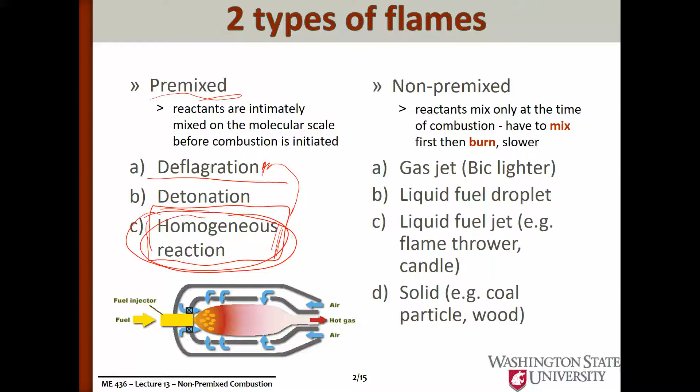Some examples of non-premix flames: these are the Hollywood special effects flames. A candle - the fuel is in the wick, the air is surrounding it, and you get some natural convection that replenishes the air while the fuel stays centered. It's only at the point where fuel and air meet where there's this cone flame.

Other examples would be our diesel engines, a flamethrower, a campfire, burning coal. All of these are non-premix flames because the fuel and the air are not perfectly mixed prior to ignition.

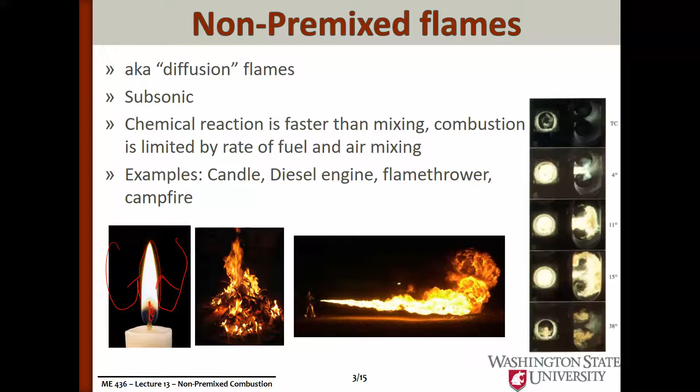In the last lecture we had this reaction zone that moved forward or backwards in one direction, in the direction of a mixture of fuel and air, and behind the reaction was products. In this case, you can imagine we have this surface perimeter where air is on the outside and fuel is on the inside, and right where they meet is where the reaction occurs. If this is a jet of fuel coming from the left hand side of this image, the center of that jet won't burn until it's been able to mix out to the edge where air is.

If you were to plot the fuel concentration, on one side there's some high concentration of fuel, and as you get close to where the reaction is occurring, the reaction is consuming that fuel, so there's going to be virtually no fuel in the area of the reaction. Same idea with oxygen from the other side, and in the area of reaction we have a high concentration of products, because as soon as the fuel and air meet, they react.

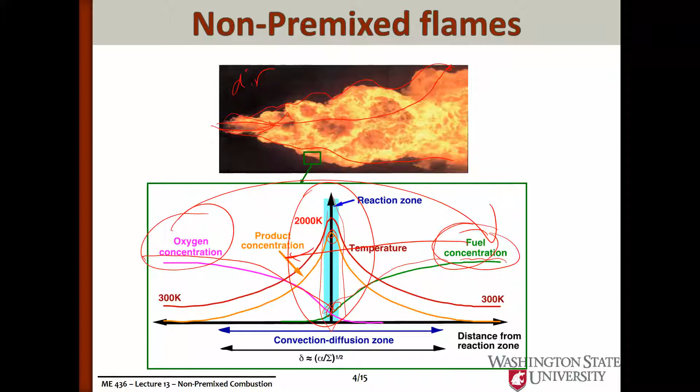Then we need some external force that is mixing this oxygen and this fuel so that this reaction zone moves to another place, or somehow moves more of this fuel to this location where it'll meet up with more oxygen.

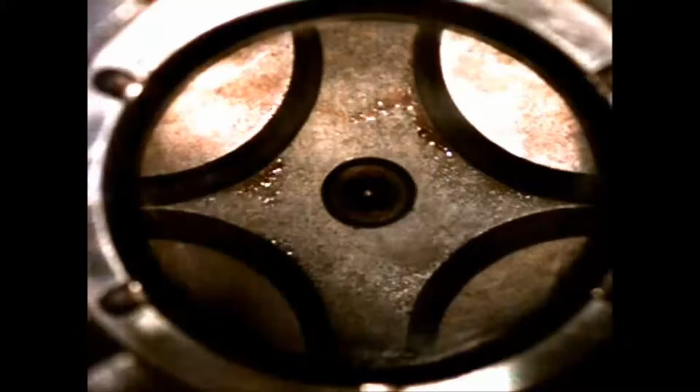You can see the spray of diesel coming into the engine. This is just before top center. You can see in this next segment a whole lot of ignition points. Each of these little bitty flames is an ignition point, and it burns all of the droplets of diesel fuel all throughout the engine.

And then you had some wicking along the walls, and that fuel formed a sheet of fuel along the edge, and then that burns. So in those areas near the walls at the end, you get something similar to premix fuel, but throughout the entire engine, you had those individual droplets that were burning.

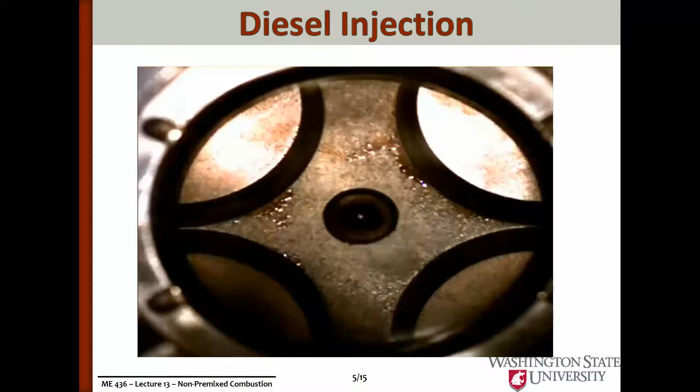This next animation shows it in a little more detail, and because it's an animation, they can zoom in. Note how they spray the fuel in different segments, and pay particular attention to the shape of the piston head. That shape is there to create swirl and help with turbulence as it combusts.

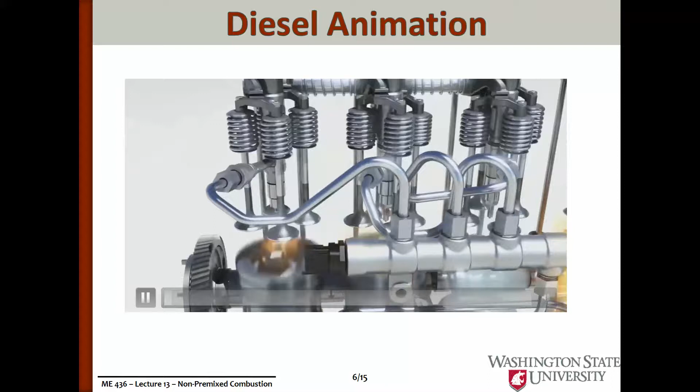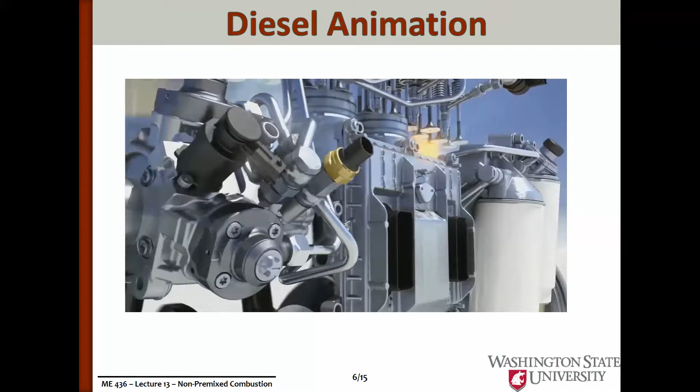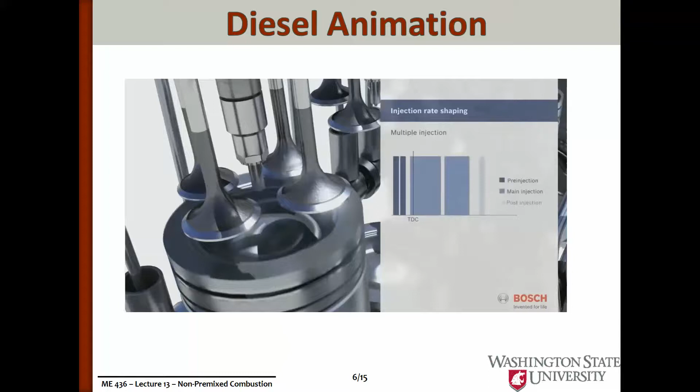Fuel lines connect the injectors to the rail. A stable pressure level is maintained at all times for the injectors of all cylinders. The quantity and length of injection can be controlled electronically at any time, regardless of crankshaft angle. Bosch solenoid valve injectors control the nozzle needle so quickly that the injection process can be divided into pre, main, and post injections, up to 8 separate partial injections per power stroke.

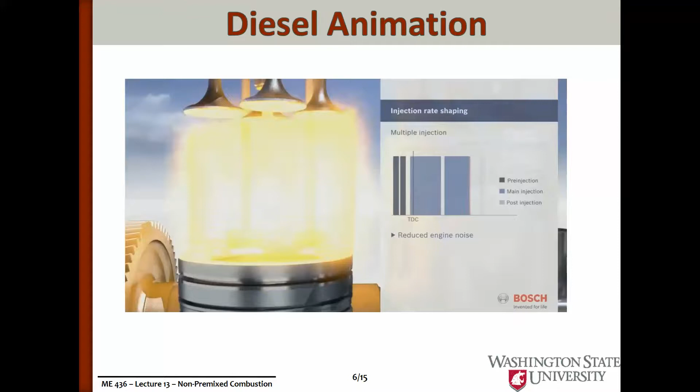The pre-injection serves chiefly to reduce combustion noise, and the post-injection to reduce internal engine particulate or to raise the exhaust temperature.

The high pressure results in a very finely atomized spray of fuel. Tiny fuel drops exhibit a large surface area in relation to volume. That promotes a speedy combustion process on one hand, and on the other hand, helps reduce the particulate mass in the emissions.

This visualization helps you see the droplets and how the edges are evaporating, and it's right at that point that the flame occurs. So that evaporated fuel mixing with the air creates these streaking combustion events.

The other thing this video illustrated was something we can do with direct injection specifically for diesel engines. Because the gases in the cylinder are at such high pressure and temperature, as soon as the fuel gets in there and mixes, it's going to react. We don't need a spark plug.

So what they're able to do is spray a little bit in first so that there's not a sudden increase in pressure in the cylinder, so the forces on the piston can be smoothed out. That's why they do the first couple sprays.

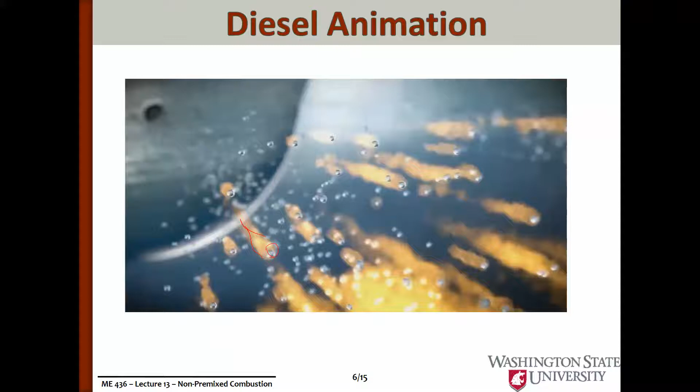We also now hear all the time about gasoline direct injection. I want to point out some of the critical differences between diesel direct injection, which we've always had to do for diesel engines, and gasoline direct injection.

What you're going to notice is this injection occurs during the intake stroke, long before the combustion occurs, and the shape of the piston head is very different. The goal of these piston heads is to facilitate a higher concentration of fuel in the area immediately around the spark plug.

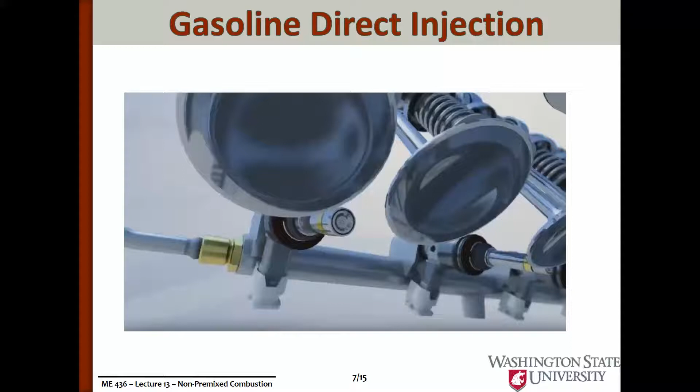And it will create this tumble motion that I'll point out when the video ends. The fuel is directly injected into the cylinder.

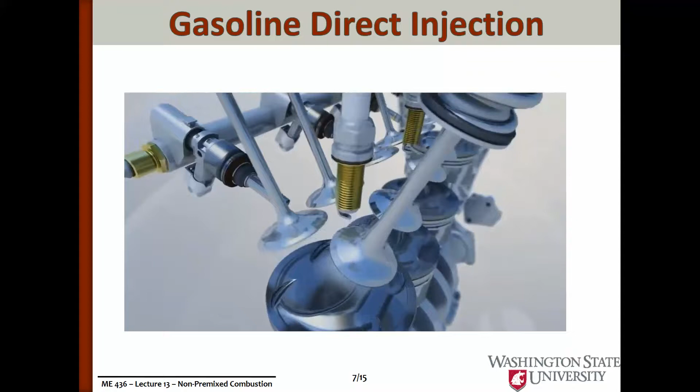Thanks to the optimized wide bowl on the piston and the injection during the compression stroke, an optimal mixture of the fuel and air is formed near the spark plug, and this leads to a clean ignition.

If you notice, there were some little gray droplets that seem to have this motion - that's what we'll refer to as tumble. Squish was when the cup, which has this sort of shape, created these swirl eddies. Tumble is a bulk motion from the gasoline direct injectors, creating a single large tumble motion.

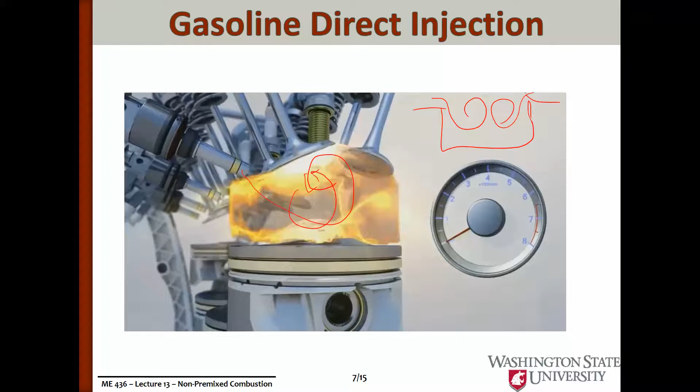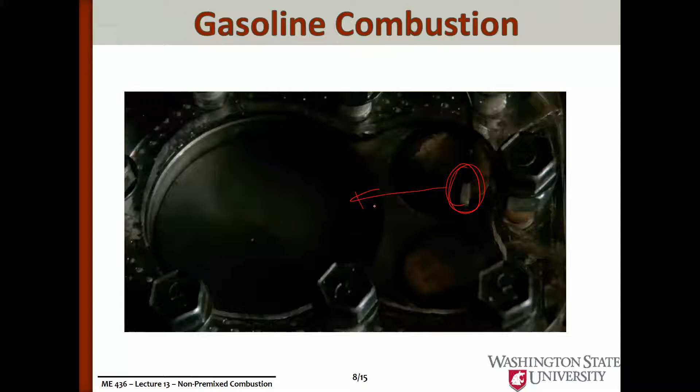Here's another video of an actual engine, this being gasoline combustion. You'll see a spark plug from this right side, and the flame will very quickly propagate from right to left. Basically, before the piston has moved much at all, the flame is able to reach the far side. Flame's already there, piston had barely moved.

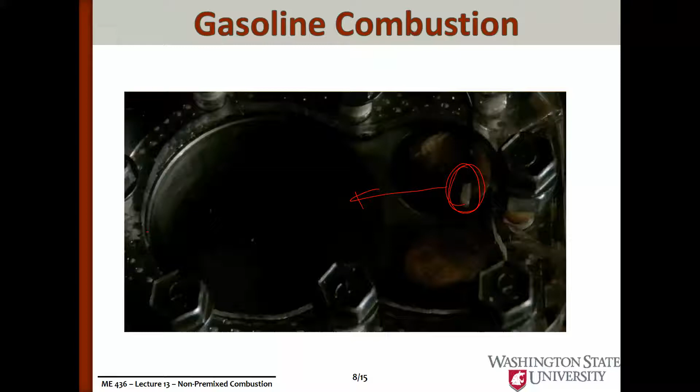We can put these two types of combustion together in theory, and we get something called homogeneous charge compression ignition. You can also think of this as controlled knock in a gasoline engine. To date, no one's actually commercialized and sold engines like this - it's very hard to control the spontaneous ignition to happen at exactly the same moment in every cycle. We can get pretty close and fairly stable for steady highway driving, but that's very different from when you put the pedal to the metal or let off the throttle.

Mazda is bringing to market in 2019 what they refer to as their SkyActiv technology. It will still have a spark plug for certain modes of operation like high power, but for steady highway driving, something like 80% of typical engine use, it will operate in this homogeneous charge compression ignition mode.

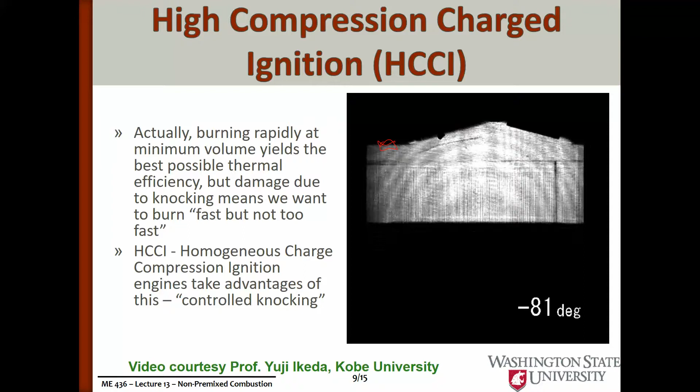This video tries to show it. It's a schlieren image, so you get the shadow graph, and you can just barely see the combustion event where throughout the entire region it all burns simultaneously. It puts a lot of stress on the engine, but it makes for efficient and complete combustion.

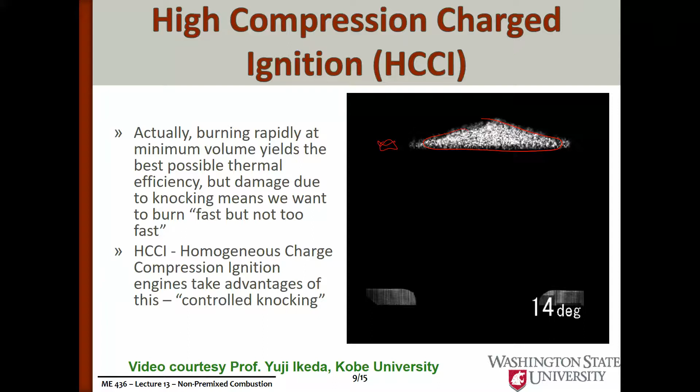The other advantage of HCCI is that we can burn leaner mixtures in a gasoline engine. With the spark plug, we need something closer to stoichiometric to ensure the flame can propagate fast enough. In high compression charged ignition, we can operate leaner, the same way we operate diesel engines. The high compression ratio also improves the efficiency of the engine.

The problem is just controlling that spontaneous ignition to be at a specific moment that we're controlling. It's difficult to do, and those slight variations in air and fuel between cycles cause instabilities in these engines.

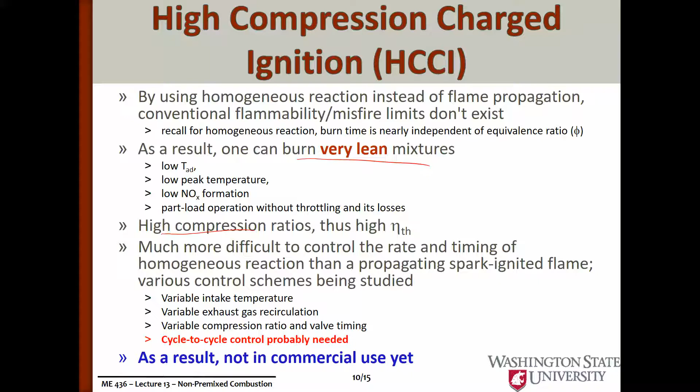If we were to plot where these different types of combustion occur in terms of equivalence ratio and flame temperature, your normal spark ignition combustion engine runs at an equivalence ratio of 1. It's the highest temperature combustion, and our primary concern is the formation of NOx.

The diesel engine, even though we're running lean when you account for all of the air and all of the fuel in the cylinder, locally, where it's actually burning at the edge of the droplets, it's burning rich. So we have less concern of NOx and more of a soot concern with our diesel engine.

The quicker we can get those miniature droplets to evaporate, the smaller we make those droplets, we move up this curve and hopefully operate in the sweet spot between soot formation and NOx formation. That's where diesel engines, clean diesel, are trying to operate.

The high compression charged ignition is a pre-mixed engine, so we don't have any local rich versus lean areas. It allows us to burn at lower temperature where we can be slightly lean, and then we're out of the NOx region, we're not forming soot - it's very efficient and quite clean. But making it stable and repeatable is difficult.

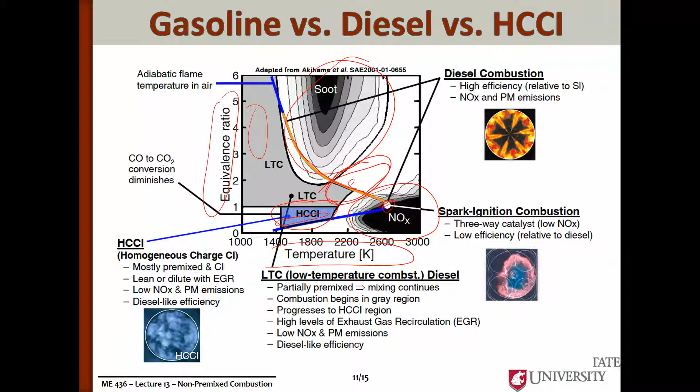The last part of this lecture, I want to talk about misfire. We've already introduced the problem of knock, which is if the flame front is taking too long, then the residual fuel and air mixture in the corners will spontaneously combust before the flame has gotten there.

The way to avoid knock would be to speed up your engine - higher RPM, higher flame speed - so we don't have enough time for the homogeneous ignition to occur. So engine knock typically occurs at low engine speed. At higher engine speed, our concern is more in terms of misfire.

Those slight variations between cycles can change the equivalence ratio substantially. In one cycle, there may not be enough fuel in the area immediately around the spark plug, and when it fires, it may not produce a flame that propagates through the cylinder, so it misses fire.

We can, in a laboratory, burn gasoline at an equivalence ratio of about 0.5. In an actual engine, we start to see misfire in spark ignition engines somewhere around an equivalence ratio of 0.65 to 0.75, and that depends partly on the RPM.

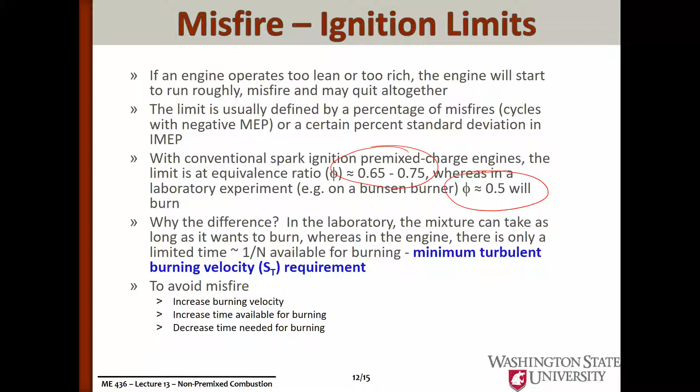That's the major thing that leads to misfires. So in one realm, we have to worry about knock. In the other direction, we have to worry about misfire.

Don't worry about the details of this slide. What I want to get at is this evolving window of where we can operate in terms of equivalence ratio to avoid both knock and misfires. When the engine's cold, we can run in a pretty wide region from stoichiometric to an equivalence ratio of about 0.7, 0.65. As the engine heats up and the air coming in is hotter and less dense, we'll move in this direction and start to run into problems with knock.

The higher the air temperature before we compress it, the higher the temperature when we finish compression, and that speeds up the homogeneous reaction, which leads to knock. So the higher the intake air temperature, the more likely we are to knock, so we need to operate slightly leaner.

The sweet spot in terms of adiabatic flame temperature is somewhere between 2000 and 2100 degrees. We tend to avoid NOx formation, but we're right on the edge of misfires.

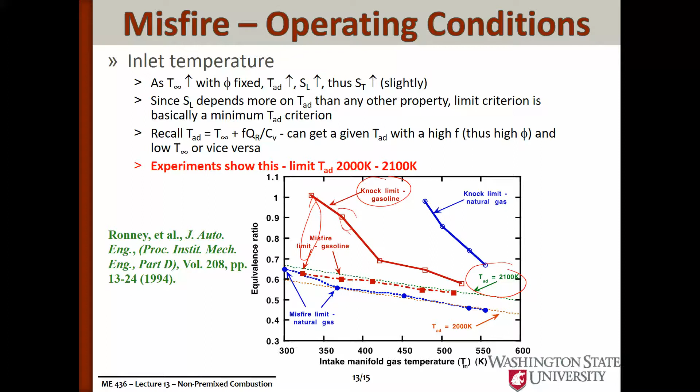This reiterates that flame speed is a small function of pressure, not as much as it is a function of adiabatic flame temperature. So when we drop the pressure on the intake, it slows down flame speed and leads to more misfires.

For misfire, the biggest thing at a given engine speed is when we suddenly throttle back the engine—that is the most likely time to worry about misfire.

More turbulence means a higher turbulent flame speed, which limits both misfires and knock, but too much turbulence extinguishes the flame. So we need turbulence to a point, and that's our main design feature with how we shape the piston head, how we shape and control the spray of the fuel coming in. All of those things create the precise amount of turbulence that we want.

Another way to avoid misfires is to add multiple spark plugs to your engine. A lot of race car engines often do this with multiple spark plugs.

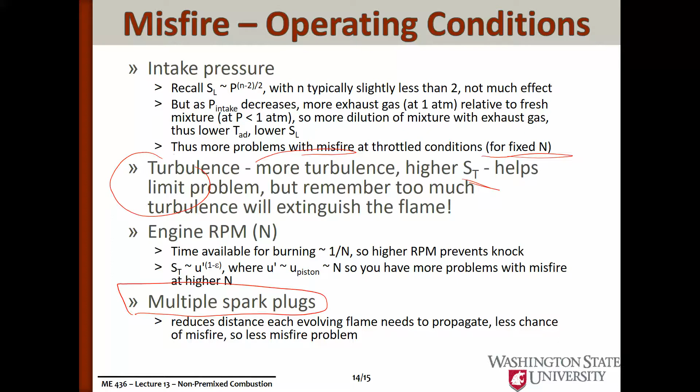I'm going to conclude today with a little example. This is basically just a geometry problem. The last two lectures have been heavy on the concept of knock and misfire and the different features of combustion. This is trying to highlight how in a spark ignition engine the flame doesn't move at a steady pace.

For reasons of how the spark plug works, we want a rich air-to-fuel mixture in a small volume immediately around the spark plug, just to get the reaction going. You can think of it as having enough critical mass, critical energy release, that the flame will propagate. So we need that right around the spark plug, but the rest of the engine, on average, can run quite lean. Once that flame is going, it can propagate through a fairly lean mixture, in this case 22:1. The flame speed of the rich flame and the lean flame are very different.

Let's take this example: in that rich region, just the 2.5 centimeters immediately around the spark plug, the flame's going to move pretty quick, 28 meters a second. In the slower region, the rest of the cylinder, it's going to move at 17 meters per second.

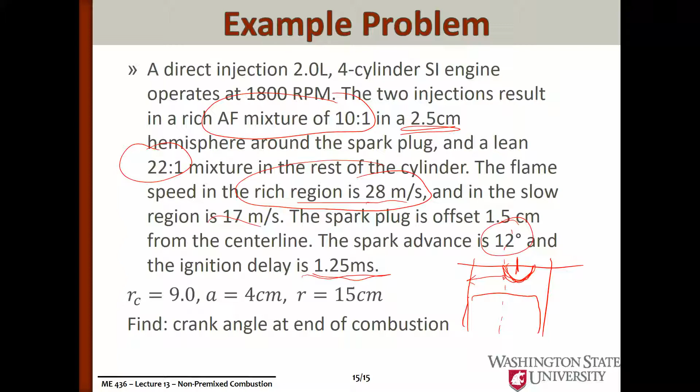From the moment the spark fires to when the flame actually starts taking hold and moving is 1.25 milliseconds. The goal of this question is to find what is the crank angle when the combustion is ended, or when the flame has reached the far wall.

In this example, other things we'll need to know: the speed is 1800 RPM. We need that it's a 2-liter 4-cylinder with a crank offset of 4 centimeters to get to the bore and these lengths. So I'm going to switch over to OneNote and go through the details, or the solution to this problem.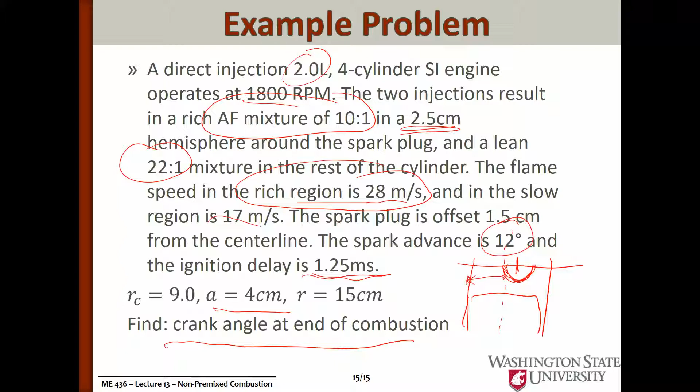Okay, so the first thing we need, let's sketch out what's happening. We've got our cylinder, pistons in there, it's connected. Let me draw the top here. If there's a center line, our spark plug is 1.5 centimeters from the center line to the spark plug. And we need to know, oh, the other thing is this distance of 2.5 centimeters.

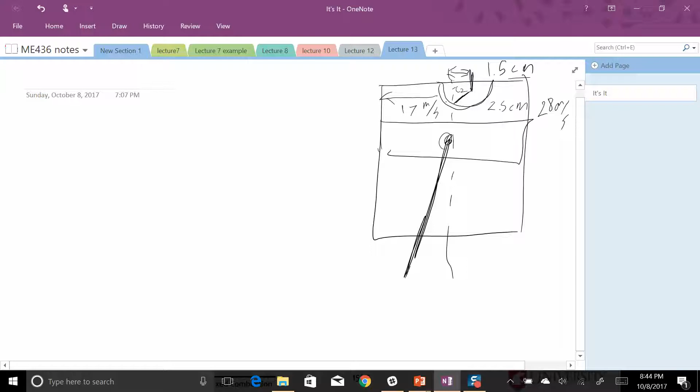It's going to be burning at 28 meters per second, and then for the remainder of this, it's going to be burning at 17 meters per second. So our goal here is really just to add up the time. There's 1.25 milliseconds for the flame to start. There's some amount of time, and we'll call that T2, for the flame to burn through the rich region, and then time T3 for the flame to burn all the way to the wall. Let's find out those 3 times, and then we'll convert that time to a crank angle.

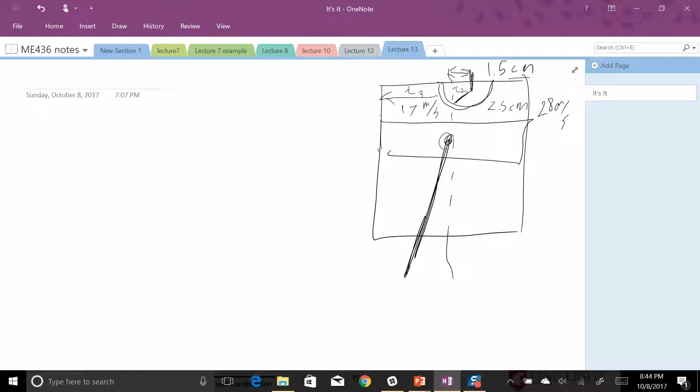So to finish out the geometry, we need the bore of the engine. That's going to be the total volume displacement over 4 cylinders, times we need 4 over S times pi, and that's to get to bore. So we have a bore in this case of 0.0892 meters, or 8.9 centimeters. So a typical engine size.

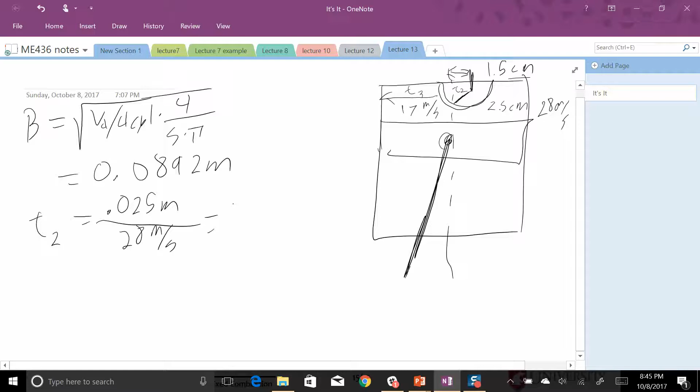So the time T2, we know there's a hemisphere here that's 2.5 centimeters in radius, I believe, that will burn at 28 meters per second. So T2 is going to be that distance, 0.025 meters, 2.5 centimeters, divided by 28 meters per second, and that's going to be 8.93 times 10 to the negative 4 seconds.

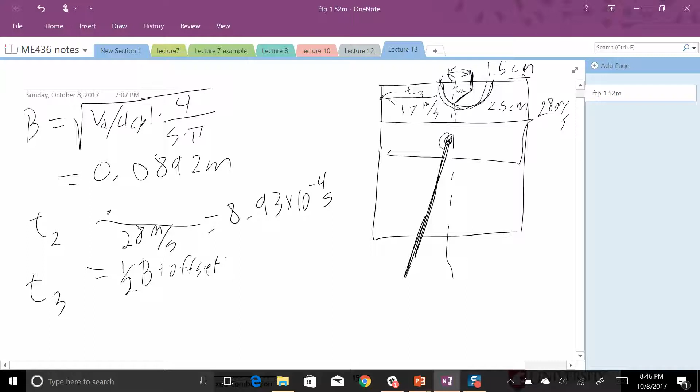And then the third part of the flame is going to burn, how far is it going to burn? Well, from center line to here would be half the bore, and we've offset the spark 1.5 centimeters in this direction, and that first flame burned 2.5 centimeters. So we're at a point here 1 centimeter away from the center line and all the way to the edge. So that's going to be half the bore plus the offset minus the 2.5 centimeters.

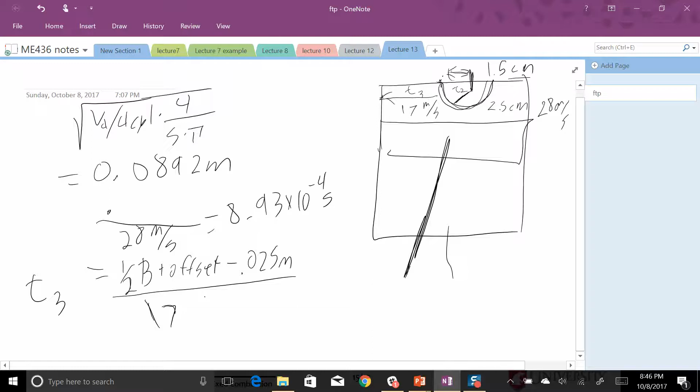And we'll divide that by the 17 meters per second. And when I do that, it's 2.035 times 10 to the negative 3 seconds.

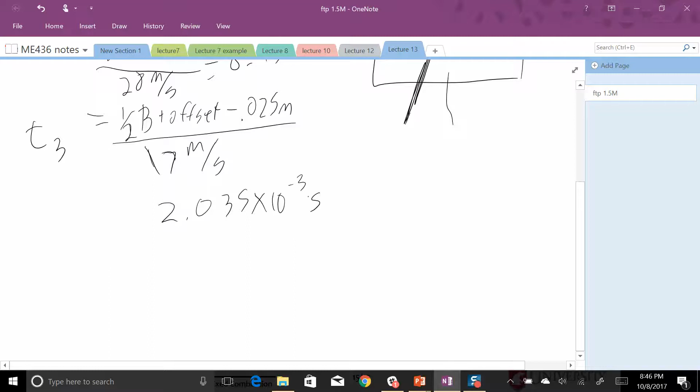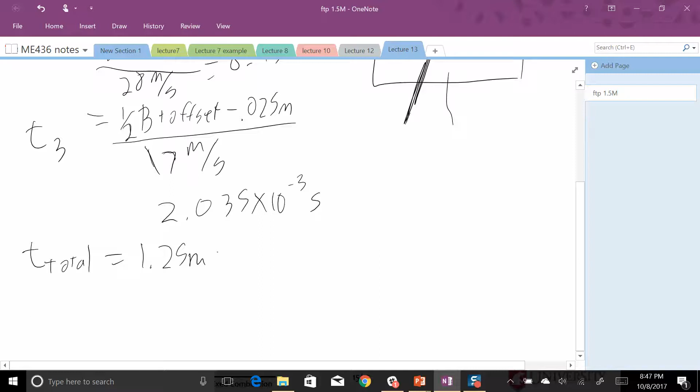So if I get the total time of combustion, so we'll call that T total, is going to be equal to the 1.25 milliseconds that it took for the spark to ignite the fuel, plus the time to burn in the rich region, which is 0.893 milliseconds, plus this time to burn all the way to the wall, so plus 2.035 milliseconds.

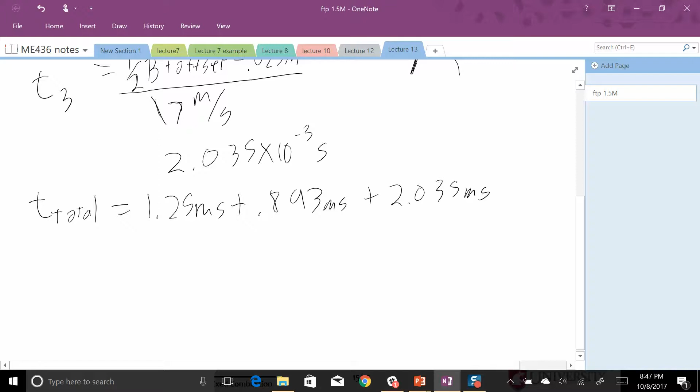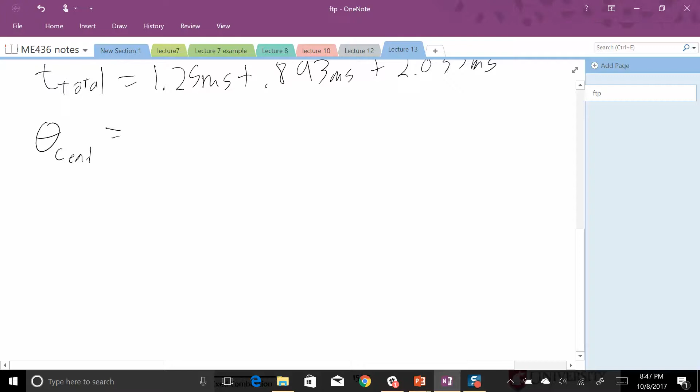And I don't actually have that written down because I did it in terms of crank angle. So if I get the theta at the end of combustion, theta C end is equal to the engine speed times 2 pi, or 360 degrees if we're doing it in degrees, times the time. So that is the crank angle of combustion minus the spark advance.

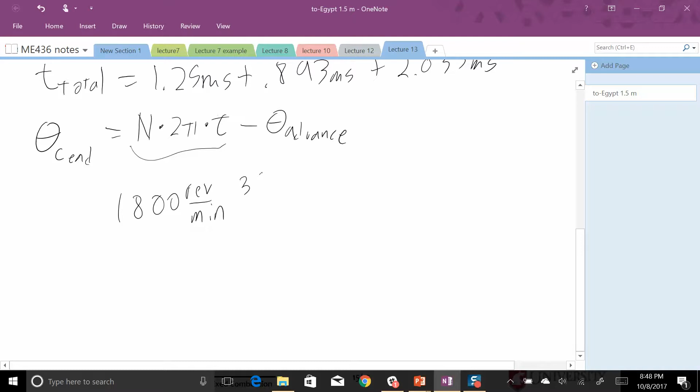So in this problem, we have an engine speed of 1800 revolutions per minute, and I'm going to do it in degrees. So there's 360 degrees per revolution, and then I need it in milliseconds, or seconds, either one works. So I'm going to need to do 1 minute over 60 seconds, and then multiply by whatever this T total was, in either seconds or milliseconds. And then I'm going to subtract the 12 degrees of spark advance, and I will get 33.1 degrees.

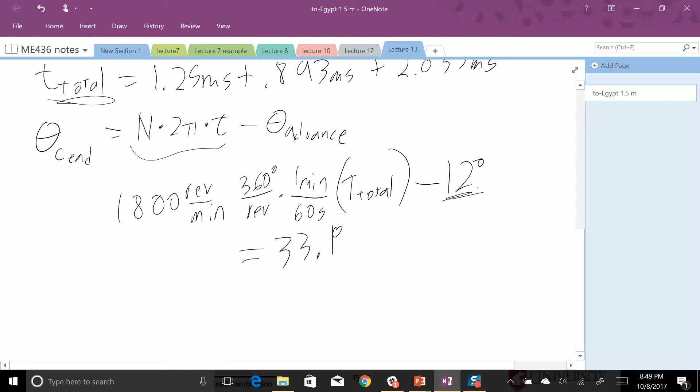So that's taken some amount of time. We started the spark 12 degrees before top dead center. We've finished the combustion 33 degrees after top dead center. The piston has probably actually moved a significant amount during that combustion event. Well, that concludes this lecture.